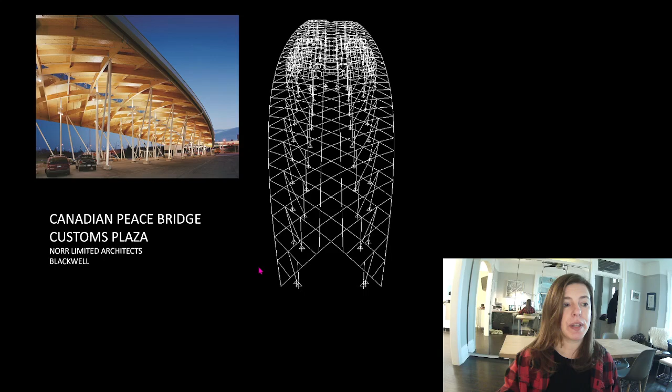NCFS headquarters - if Doors Open Toronto allows access to buildings this year, take the opportunity to walk through this building. It is absolutely stunning. It is the Native Child and Family Services headquarters.

This is an institution run by Indigenous people for Indigenous people, focused on the well-being of children and family within the Indigenous community in our district. They have places around Ontario that I know of, but maybe it's even national. This is a really lovely building - they really did it with focus, and Levitt Goodman is fantastic at dealing with bringing in Indigenous design features, and working with Indigenous designers to help realize these projects.

And they came to us, and this was probably 2007, 2008. They said, we want a modern representation of a Native longhouse. So we went away and said, okay. Dave and I had been playing with reciprocal frames, and we were really looking for an opportunity to use them. Reciprocal frames use small elements in a repeating pattern, and it's not stable until it's all in place. It has a lot of benefits.

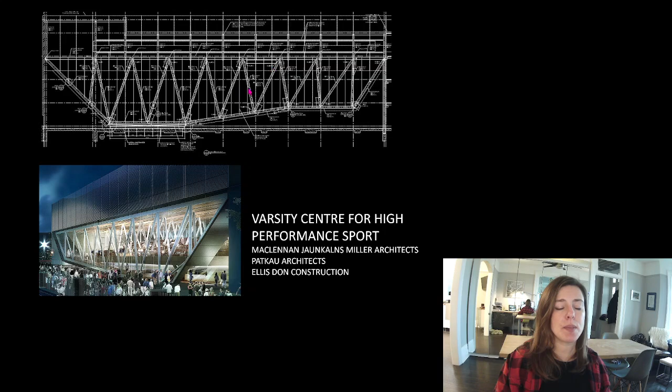If you've had the opportunity to go to the gym last term or even the year before, this is the Varsity Centre for High Performance Sports. This building does not touch down here at the ground. It is supported here and here, a 54-meter clear span over a field house or a gym below grade. So there was all kinds of reasons to do this, but it's a really unique kind of building structure.

So let's go through what this lecture is going to be. First, we're going to talk about what the expectations are for this course. Then we're going to go through strength, stiffness, stability, and then I always end the lecture with takeaway tips.

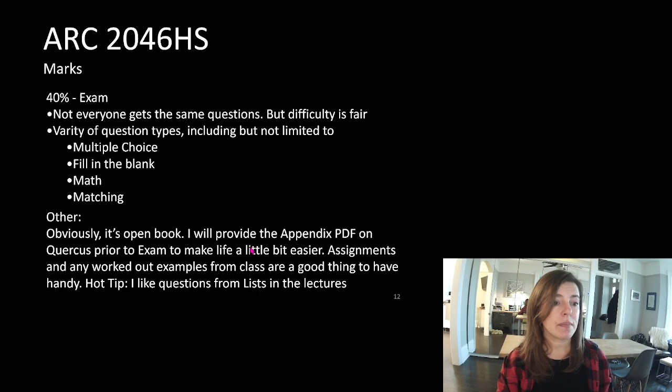So for the classes, I post the PowerPoint and the link to all the videos on Quercus. The first slide will outline the lecture and the learning points. The last slide will be the important items I think you should take away from that day's lecture. The PowerPoint and video will be posted by Thursday each week - my goal is always by noon. Today might be a tiny bit late, and I'll address that in just a second.

For the tutorials, assignment answers will be available the day after the assignment due date. Try to submit any questions to the TAs prior to the tutorial - maybe it gives them a chance to get their head around something, or maybe they have to do a little research to help give you your answers.

I want you to remember there's only one of me, and there's over 90 of you this term, plus I'm teaching Structures 1 at the same time. So start with the TAs - reach out to them and see if they can answer your question. If they can't, I am happy to get involved, but I'd ask that you start with them. It doesn't mean I don't want to meet with you, but between the two courses I have about 180 students, and if I had even a 5-minute email with each student, it would steal all of my productive time to record and prepare these lectures for you.

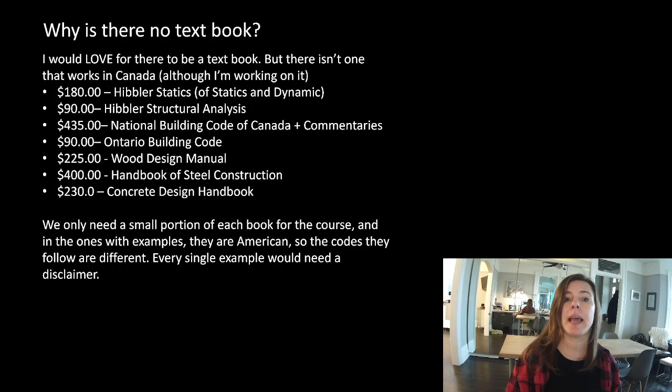And some of them actually even have published components that are accessible where you could use the problem sets and see how they relate to what we're doing. Again, there are more online resources.

One of the great things about structures is at least the majority of the components we're going through haven't changed in 150 years. The components around material sciences and earthquake design, for example, have huge advancements being made. Mass timber design is relatively new in the industry, but the principles we're following haven't changed in 100 years, which means a lot of what I'm teaching you here today is available in the words of someone else.

So if you find my voice high-pitched and annoying, feel free to look up another source to back up what I'm saying. Maybe you just need to hear it in another voice. It's purposely why I get Dave to give the lecture in your studio course on how to think about structures or how to pick your structural system, simply because you'd have heard my voice so much. I want him to give that lecture so you can hear some of the same things in his voice, or a different voice.

Don't worry about that. Okay, so why are we doing structures? You guys are architects, you're going to hire an engineer to do all your structural work, and that's true. Except you guys are often picking the materials and doing the layout and making preliminary drawings with preliminary sizes on them. To do all of those things, you have to understand material limits, and you have to understand the relationship between depth, length, strength, and deflection, and that a small change can have a big impact.

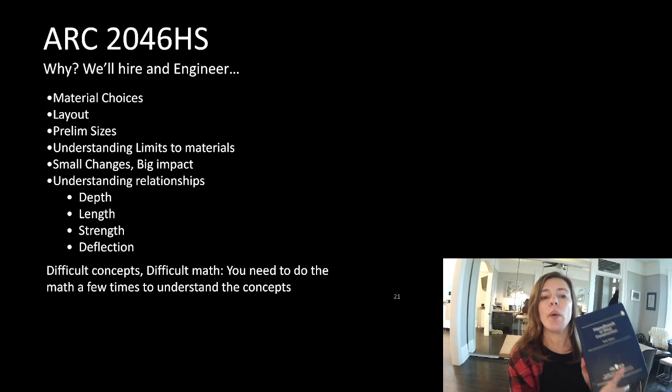So we're going to do, for example, when we get into our steel component, we are going to open up this book and flip directly to some pages that have very specific equations on them, and we are going to go through and do those equations. We're going to have to figure out what all the variables are, find the information for those variables, and then complete the math. Some of the equations look straight up bonkers, but we are going to work through them slowly, and we're going to break the math down to easily keep track of it without making mistakes. I'll try to go through that several times for you.

All right, structures 1 versus structures 2. In structures 1, we learned how to create our system. We learned how to do our preliminary design. Remember, that was all of our sizing guidelines or our rules of thumb.

For those of you that are just jumping into structures now, our sizing guidelines are posted on Quercus. You're going to want those. Those are going to be very helpful for preliminary sizing. You will probably use those throughout your career.

We figured out what all the loads are that act on a building. We looked at the load path. So how does the snow on the roof travel through the metal deck to the joists, get to the beam and get to the column, and then transfer all the way down to the foundation, and then design the foundation so it gets out into the soil.

So how does that snow load up on the roof make its way through the building to come out into the soil below the footing? And then we looked at what the internal element loads are.

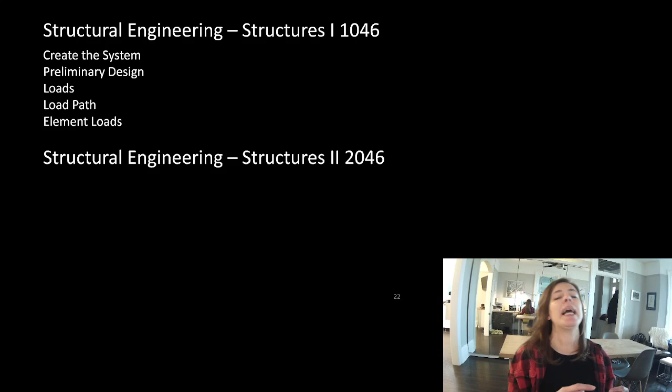We figured out what the worst factored internal loads were for those elements. Remember, factored means we figured out what all the loads were, combined them, and added an extra bit to make sure that was a reasonable load, but bigger than anything we should ever see. We could have multiplied it by 100, but then we'd probably have buildings that were unbuildable. So we gave ourselves a little bit of extra load, but not too much. We were very strategic about what we did there.

In structures 2, we need to design and size the members. Sounds simple, right? Well, to do that, we have to bring all of those concepts together. We know what those internal loads were on that member. We now have to find what member with a reduced capacity is strong enough to support those loads. Depending on if it's steel, wood, or concrete, the methods are slightly different on how to calculate that reduced capacity. And remember, we have to check axial loads, shear loads, and bending moment loads. So there are a few things we're going to have to look at here.

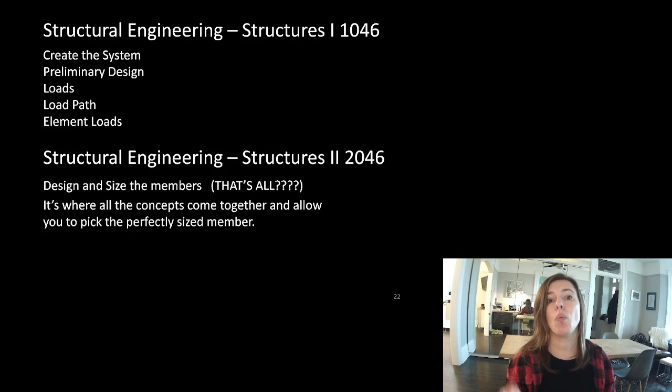But by the end of it, we're going to have a perfectly sized member for our problem. Remember, perfectly sized means it's going to have a reduced capacity greater than the factored load. It's going to be stiff enough to not cause damage to finishes. It will obviously be stable, because that was problem 1 that we solved. And it's going to be the cheapest possible solution we can find. Remember, cheap is often related to weight or the amount of material within the object. So number 1 goal: cheapest solution within our criteria that meets all those requirements.

So structural sizing guidelines, or our rules of thumb. Remember, it's key to remember that they're guidelines. They are not the designed solution, and they are mere suggestions. You can deviate from them, but we want to make sure you're showing something reasonable on your preliminary drawings.

If you're designing a 5-story building, and on your project you draw beams that are this deep, you have a height restriction on your building and you've built right to the maximum height you possibly can. Your floor to floor height is pretty tight, just meeting the building code requirements for somebody to walk around in that building. You go to the engineer, you get that member sized, and you find out it's not that deep, it's actually this deep. Now you have this amount times 5 that you have to add onto the height of your building. You're over your maximum building height, which means you have to chop a story off your building, and now the owner comes back and says this building isn't financially feasible for me anymore.

I needed to sell a certain amount of retail space to be able to make this project possible, so we have to scrap the whole project. It would have been very important to know that at a very early stage in the project, or come up with a framing solution that would allow your member sizes to be that shallow.

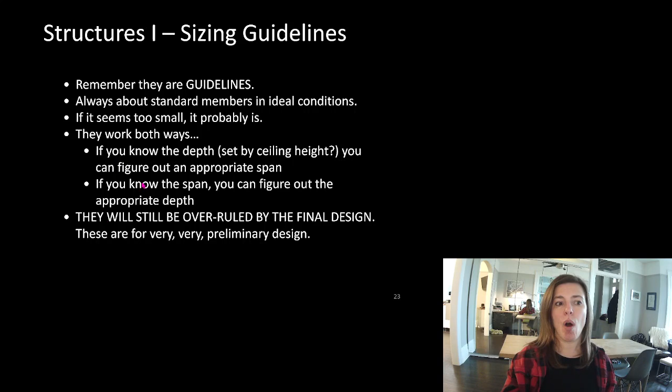We also looked at loads. We're going to go through some of this in depth next week. We figured out what the dead loads were on buildings - that was the self-weight and also superimposed loads. We looked at live loads for people and stuff, and we remembered that over very large areas, the probability of every single spot of that floor having that peak load on it got less and less. So with that, we got to use a live load reduction factor.

We talked about snow and wind being climatic design loads, based on a 1 in 50 year probability of that snowstorm occurring. Are we finding that we're hitting those 1 in 50 year events quite often? Yeah, we are. We're in a unique situation where the climate is changing. Some of you might not agree with that - I'm not here to quibble with you. I'm here to tell you that statistically, we are seeing an increase in some of these loads.

We looked at earthquake design. We didn't go too in-depth, just old school methods. If you have the opportunity to talk to Pedram, they'll say they have a much more complex and in-depth way to do seismic design. We kept it very simple for our structural course, really to help you understand that the ground's moving, the building's going along for the ride, and how much force is acting on that building is very much dependent on its weight.

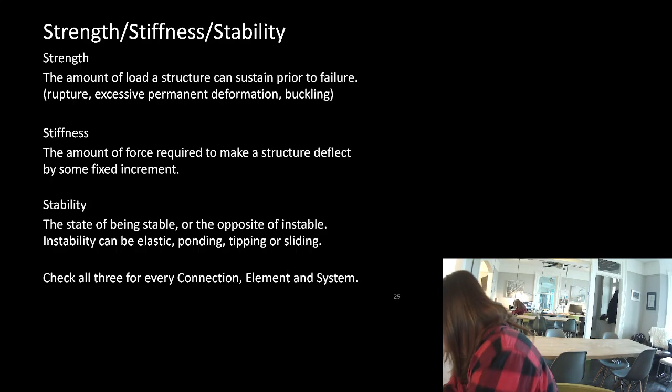Stability is making sure things don't move. So moving and deflecting are not the same thing. Movement - I've had to hide my foam block because my kids get into it and it goes missing. Movement means, is it flying up in the air? Is it sliding back and forth? And is it spinning around? We don't want those things to happen.

If it is stable and it deflects, that is stiffness. So there's deflection or deformation, and there's movement. We don't want it to move - we want it to be stable. And we have stiffness requirements or limits on how much we'll let it deform.

Strength is life safety - that's the amount of load a structure can sustain prior to failure. This is about preserving life. So we want to know how much load the structure can sustain prior to failure, and then we try to make sure we build in a little bit of redundancy in the system.

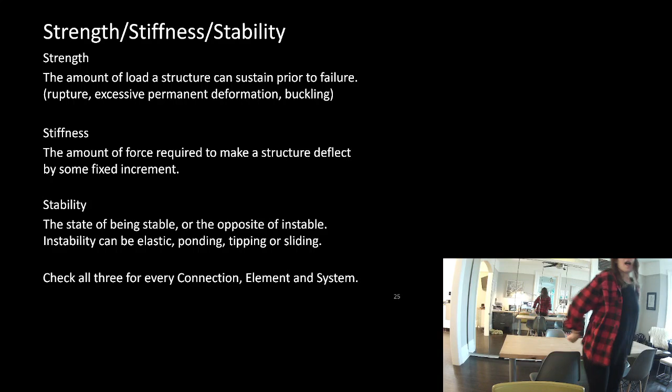Because as I've said before, if I had this table here and we designed it exactly to support the weight of me and the self-weight of the table, and I went out and ate a cheeseburger and drank a beer and came back and sat on this table, I'd make this table collapse. And we do not want that to happen.

Stiffness is the amount of force required to make a structure deflect by some fixed increment. That does not mean our object is moving - it means it's deforming or deflecting. And stability - worst definition in the world - is the state of being stable, or the opposite of unstable.

Instability can be elastic, ponding, tipping, or sliding. Basically, we don't want our object to move, and this is something you very much have an innate sense of. We have to check all three of these things - strength, stiffness, stability - for every connection, every element, and every system in our building.

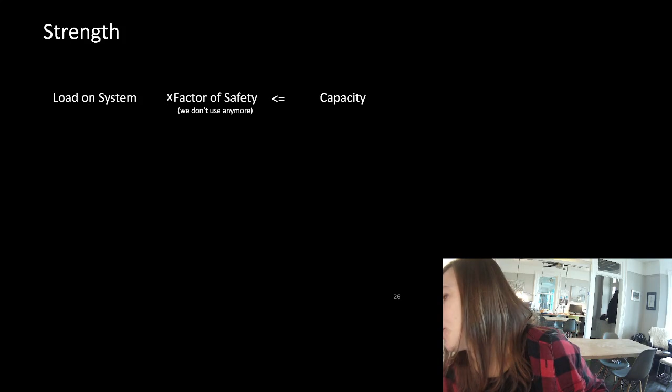So like I said, this lecture is going to be pretty light, and for most of you, it's a bit of a redo.

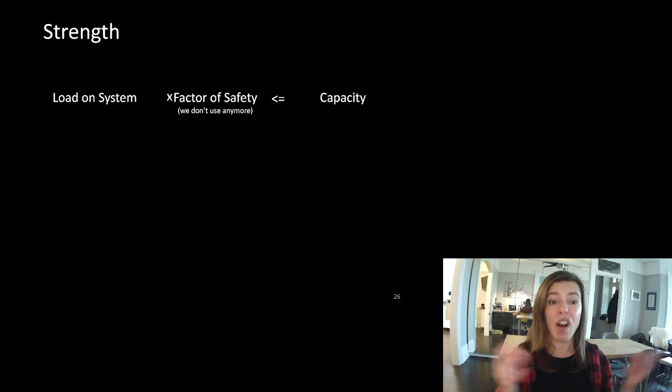But okay, back in the day, we had a different way of doing our strength design. There were flaws with this process. It was causing us to sometimes not design the best buildings, and we were wasting a lot of material. We weren't being smart in our design process.

So with this system, what we said was: I'm sitting on my table, there's the weight of me, there's the weight of the table. We add my weight and the table's weight, and then we put some factor of safety on it - maybe it's 2, maybe it's 5, depending on the application. We had a list of different things, and then we just had to make the weight of me and the weight of the table added up and multiplied by some factor be less than the capacity of the table.

The problem with that was the weight of me is much more likely to vary than the weight of the table is. The capacity of the table, though, also has some flaws in predicting it. There could be mistakes - not mistakes, but maybe there's a problem in just assigning the buffer into the load side of our equation.

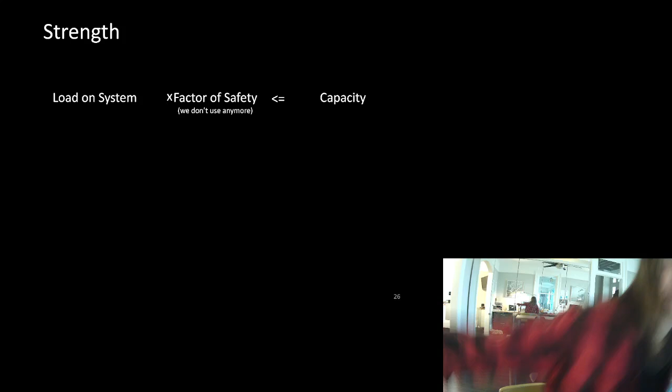So what we did is we said, well, what if we do two things differently in this method? Let's reduce the capacity some amount, and let's treat all the materials differently - let's give each material its own reduction. So we're going to reduce the capacity of each material dependent on that material.

And then we're still going to factor the loads on the system, but we're going to do it differently. Rather than add all the loads up and apply a single factor, we're going to look at each load type individually, because the odds of the table being wrong or having an increase in load is a lot less than me - I could go out and have 10 cheeseburgers and 10 beers and come back and sit on that table. I could, God forbid, have a third child and come back and sit on that table. So the variability in the live load is much greater than the variability of the dead load of the table.

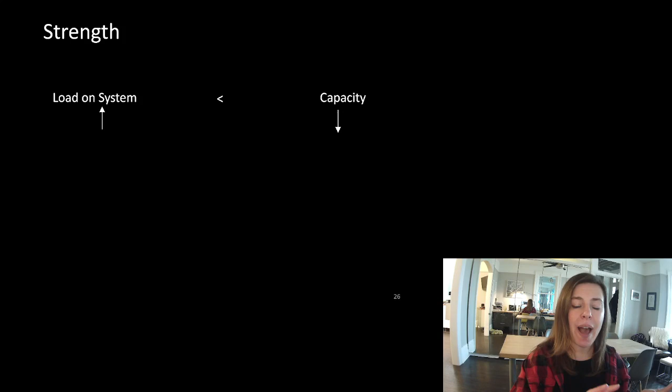So what we do now is we apply a different factor to each load type and then add them up. We have factored up the load and reduced the capacity. We want that factored load to be less than the reduced capacity. Remember, we want the cheapest thing possible within our criteria, so if they're pretty darn close to equal, we have done a good job.

We'll often use little symbols. You tend not to see the factored symbol or the alpha in front of load very often, but you will see this right here a lot in the coming term. If you see this, we are saying we have reduced the capacity. Now, engineers like to use Greek symbols for a lot of things. You're probably becoming more familiar with Greek letters throughout this pandemic. But if you see this, we're talking about a reduced capacity, or the amount we're reducing the capacity of that material.

If you see the subscript F, you know that somebody has already factored that load. If you see the subscript R, you know that somebody has reduced the capacity of that member. They have calculated what its bending capacity is and reduced it just a little bit. So this is handy because now we know at a glance if we have to factor it or if it's already been done for us.

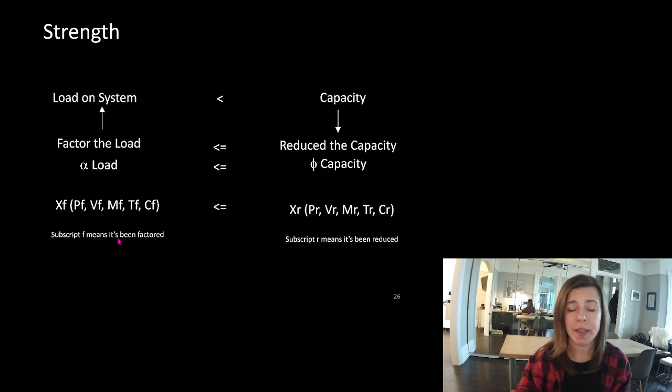This is called limit states design. We break it up into two components. The strength side of it is the ultimate limit states design. And then in stiffness, we're going to talk about serviceability limit states design a little bit, or we did last year.

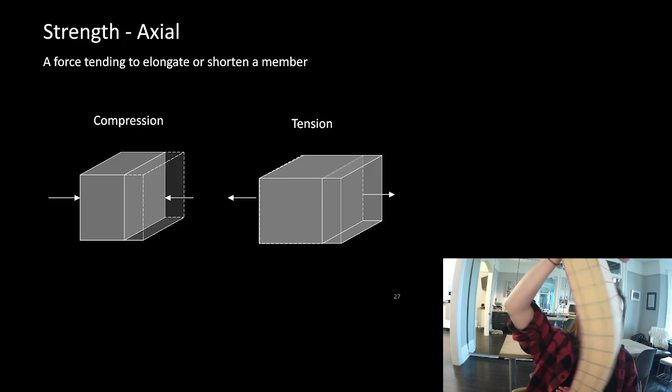So what are these force types that we talk about? Well, there is compression, and we squash things. Now, last term, we saw a lot of me using this wonderful object, and if I squash it this way, it really didn't do much to the foam, but this weird thing happened where it popped out sideways. And so that's something we're going to talk about a little bit later, and it's going to be very important in how we talk about design of materials coming up in the term.

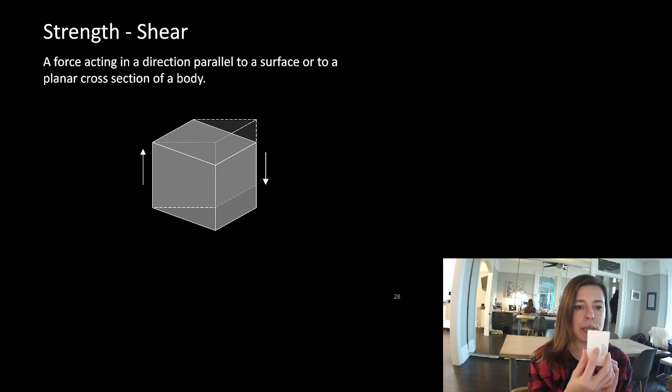Tension is when you're stretching something. Shear force is difficult for people, I find. Shear force is really what we're saying happens at each plane. These are my business cards, and I am saying that if I push down on this side and slide up on this side, I am talking about what happens on this plane. Well, then what if I go one business card over and I do the same thing? And I go over another business card and do the same thing. And we do that again and again throughout that deck of cards.

We talk about that shear at each plane. Well, I could talk about it here and here, and I want to know what shear is happening kind of on that spread out distance. So we do that at infinitesimal spots along the length of the beam. A lot of you probably recognize that as calculus. Now, we're not going to do much calculus. I'm not going to make you differentiate or do any integrals at all. But obviously there was a lot of that in my education. For us, we're going to stick to it being relatively simple, but I want you to notice something here.

This was the original shape of our square. Look at the unique shape of this here. As we shear it, this side has come down and that side's gone up, and we've skewed our triangle. This distance is shorter than this distance now. So we've had a lengthening along this axis, or a tension along that axis, and a compression on that axis. And that is a pretty cool takeaway. It almost looks like we could convert shear some way into talking about tension and compression.

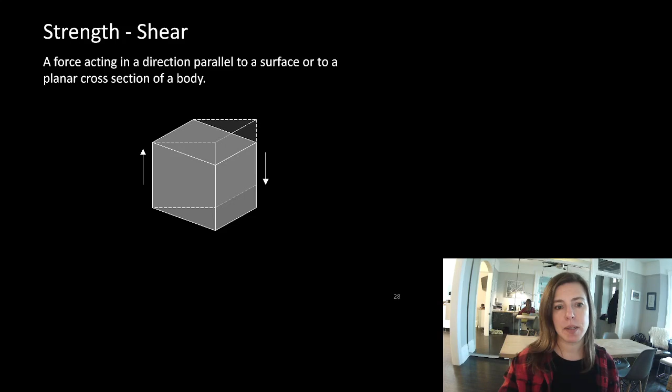Bending. All right, we've got our handy foam block here. Bending is a force that acts to bend a component, putting one side of the part in tension and the opposite side in compression. You guys remember we did this using method of sections on a truss. And when we went through, we saw that the top chord was in compression and the bottom chord was in tension. And then we talked about how that could be represented as a moment.

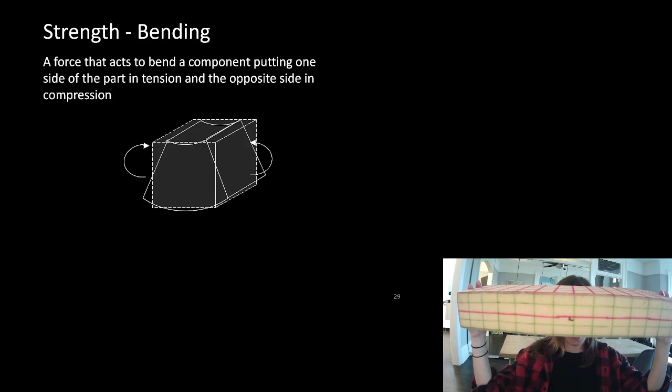So let's look at it. Let's see if what I'm saying is true. If I bend this foam block, look at that. The top is squashed and the bottom is stretched. It does in fact look like the top chord is in compression and the bottom chord is in tension. And it almost looks like there's no change in the length of that pink line. It looks like not much is happening there. It's deformed, but it hasn't stretched or compressed at all. And all of those green lines, they all look like they've stayed straight, interestingly enough.

And that's going to be really exciting and helping us in a couple weeks, I think in week 4, when we talk about stress and strain and how it relates to bending.

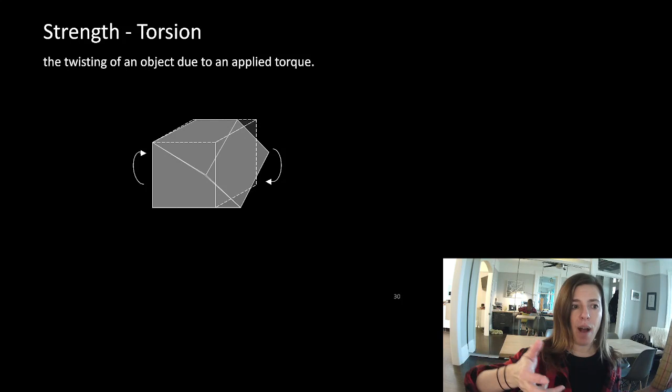So torsion isn't something we're really going to focus on in this course, but it's kind of a weird combination of bending and shear. So sometimes you'll even hear, if you've ever used an impact driver and overdriven or kind of twisted the head off, you know that you'll often say you sheared the head off of your bolt. So it's this action here. We're not really going to get into that, but I just wanted to tell you that it exists.

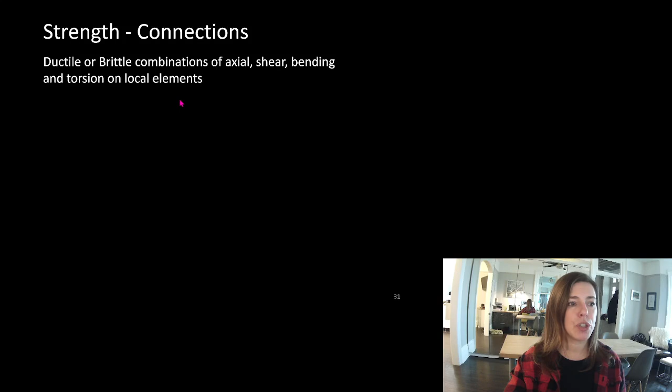Connections are where elements meet each other. And so we can have brittle or ductile combinations of axial shear and bending and torsion on a local element. So if we have a beam connecting to a column, we have to connect them with something, and that has to be designed to handle the transfer of whatever forces need to get from this object to this object.

All right, I find the best way to show images of compression, tension, shear, bending moment, stiffness, and stability is to find images that show failures. Showing you something that works doesn't really help you at all. Everything around us is meeting all of those requirements. The best way to show you what these things are is by visuals of them failing, of those things not working.

Now, concrete has almost no capacity in tension. In fact, we will often say it has zero capacity in tension. Great in compression, so great that we use it all the time. But concrete has a flaw in that we don't really know how strong it's going to be until we actually make it, and we make it on site. Wood, we kind of make the elements off site. Steel, we make the elements off site. Concrete, we make in situ.

We can try to predict what its strength will be. We can say what minimum strength we need it to be, but we can't be positive it was gotten right until we actually make it, but it's already being used. So what they do is when the truck comes to site and they pour their concrete slab or the columns or the beams, they also cast concrete cylinders. And then they take those 3 cylinders back to the shop, or the people doing the testing take them back. And at 7 days they test it, and at 28 days they test it, and at 56 days they test it. And then we see, did it meet the strength requirements we needed it to meet?

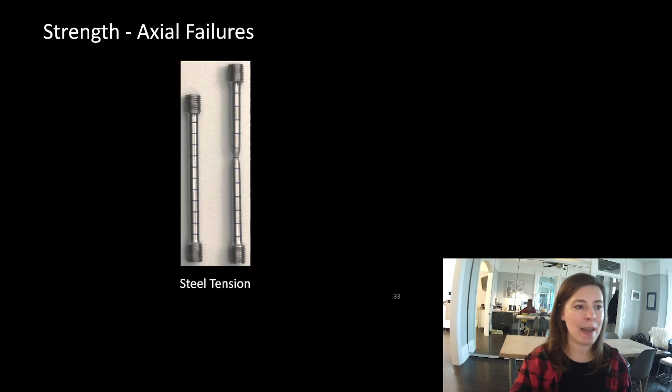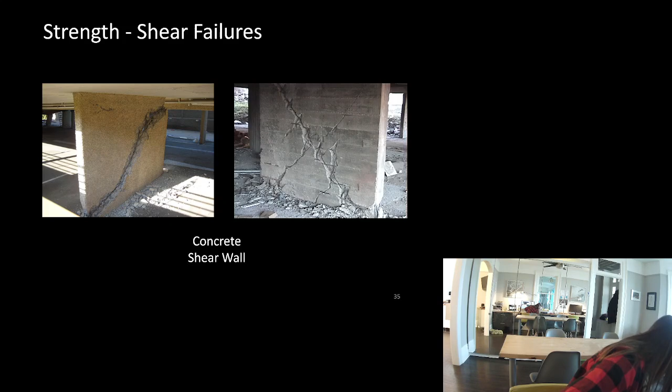That line is exactly the line of our diagonal members in braced bays. Now there's variations to those, as you guys remember, all kinds of variations we can do. But that's usually the cheapest primary format that we do.

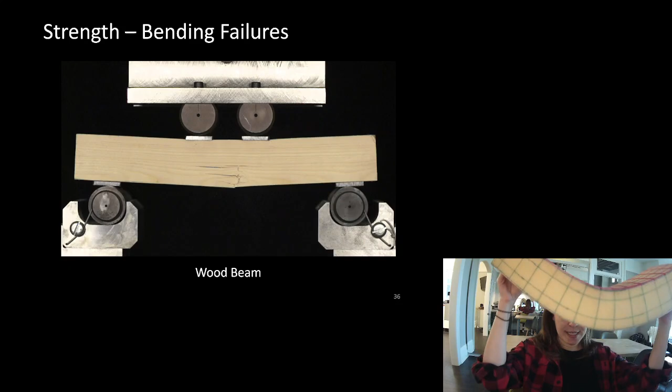All right, bending failure. This is a wood beam with a load bending downwards, so the top is in compression and the bottom is in tension. You can see that this wood split right here and we have a bending failure. I didn't list it, but there's also a crushing failure right here, where our wood kind of crushed a little bit right where the point load happened on it. Remember how we've talked about pin roller conditions? When modeling this, you can see that they've built in literal rollers into modeling this.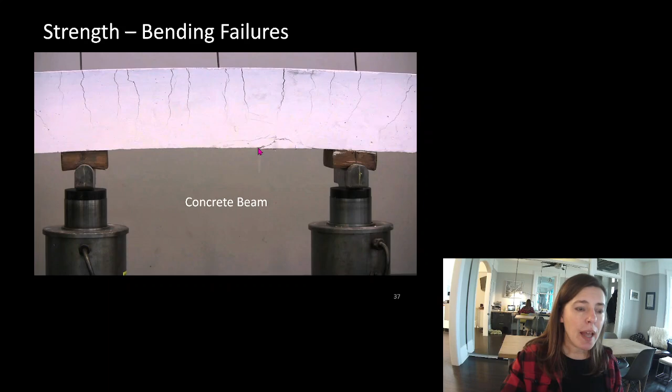Concrete is crap in tension, so you can see all of these tension cracks. Now what we do to stop these from propagating is we put reinforcing in here. Normally our beams are bending in the opposite direction, but look, there was even some crushing of the concrete right here.

Steel has a wonderful, unique property that we make use of called ductility. We're going to spend a lot of time talking about ductility.

What I've always said before is that strength, stiffness, and stability are very distinct things, but it's not always obvious how distinct they are because they can turn into each other very easily. So this steel beam had a load being applied to it like that.

At some point, it yielded here. We're going to talk about what yielding means going forward in the term. So it yielded here, and then we got large amounts of deformation. It hasn't broken through like our concrete and our wood did, but it is bending so much that we have exceeded any stiffness requirements we might have had. And look at this, it bent so much that if that was on supports, they would have come right off their supports and turned into a stability problem.

So we can see situations where it's not always obvious which thing precipitated which, and we're going to talk about those a little bit. Part of your assignment problem—it's literally the same assignment you did last year, so don't panic—some of it is I want you to think and talk about it. Have a discussion during the tutorial if you'd like, because some of these things, some of the ones I gave you in the assignment are a thought exercise, and it might not be obvious which one is the right answer. There might be multiple right answers for some of them.

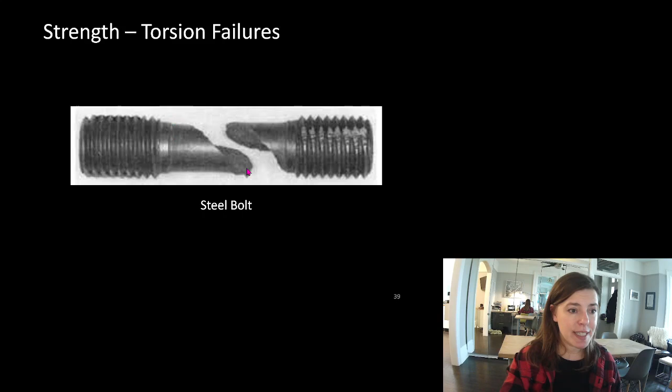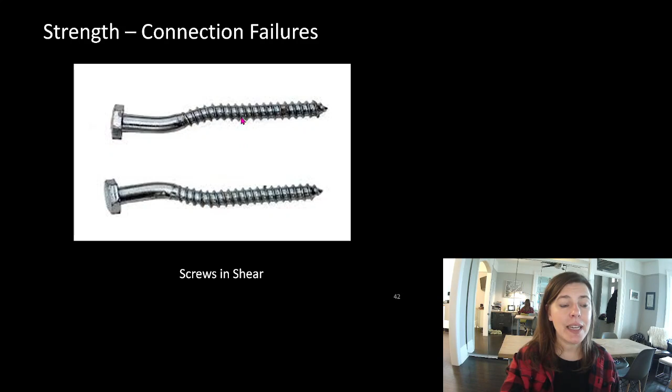All right, what I do like is this image. These are two different—these weren't in the same thing, I think it's just two sides of the same screw. But you can see that this was where two things slipped past each other right around here, and it has deformed this screw in that diagonal shape. This is a clear indication of a shear failure.

So what they'll often do is, to speed up the steel installation, they'll have someone follow around and only put 1 or 2 bolts in to make it stable while they install the rest of the steel. Then they come back and usually hire the cheapest person on the site to go back and finish putting all the bolts through, so they're not paying the very expensive crane operator to wait while they install the bolts. What sometimes happens by mistake is that the rest of the building gets built without those bolts getting put in. So when I do a site review for steel, one of the main things I'm looking for is whether all of those bolts are installed.

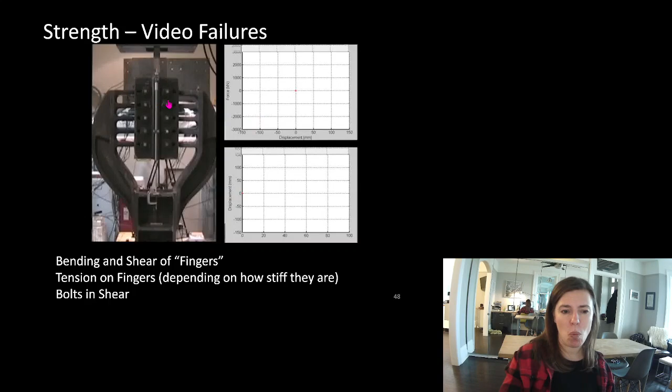So this is another cyclical loading event, and the idea here is that all of these fingers start to resist the load, and because they're triangular in shape, they really make maximum use of the steel material in resisting the loads. So there's lots of cool stuff going on in this video, but it's also really fun to watch stuff fail. Feel free to watch that video too.

Okay, let's move into stiffness. So that was all strength. Let's talk about stiffness now.

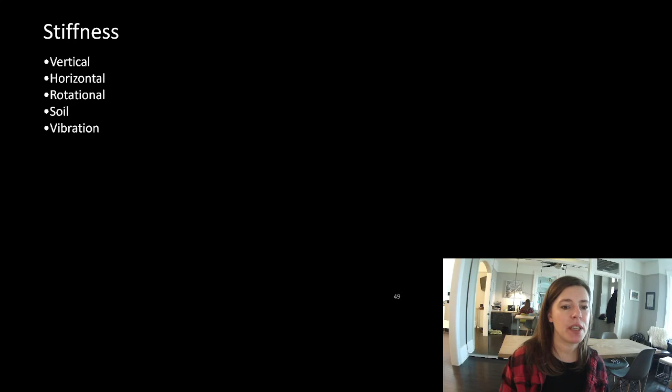Stiffness, we have stiffness criteria. It's not about life safety. This is usually about preservation of finishes and human comfort. We're going to talk about what goes into defining the criteria in the next slide. So we're worried about vertical stiffness, horizontal stiffness, rotational stiffness, soil stiffness, and vibration. Now, some engineers would argue that vibration doesn't really fit in with the stiffness criteria, but in terms of talking to architects, I find it easiest to lump vibration in with stiffness.

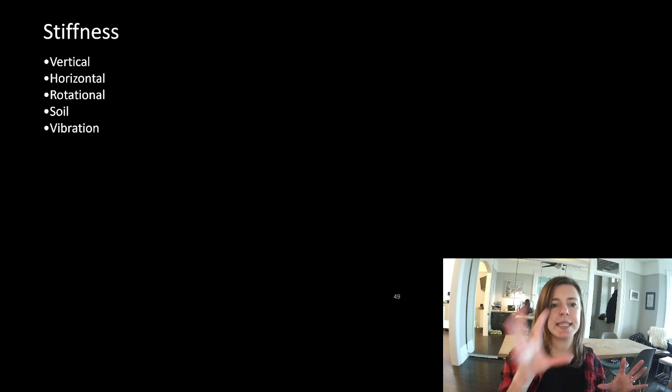Now, don't worry about this too much, but I just wanted to let you understand the term stiffness. Most people understand flexibility. Well, stiffness is just the opposite or the inverse of flexibility. If something is very flexible, it's not stiff. If it is not flexible, it's very stiff.

So what sets our stiffness guidelines? Well, human comfort. Are we comfortable with whatever is happening? People don't like standing on a floor that bows, or if they walk across it and feel it drop while their load is on it and they come back up. Preservation of finishes is a big one. We don't want to see cracks in our ceiling. We don't want our windows to bust. Stability can set stiffness guidelines. Something might need to be stiff enough that it doesn't turn into a stability problem, and we'll talk about that. It can be tied in with drainage as well. And then interface with building elements, so how two things might deform relative to each other.

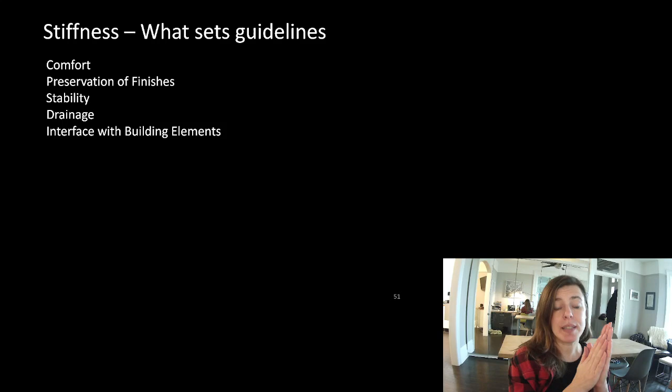So some of the math that you'll have to do in this week's assignment, which again is the same as last term, is about serviceability limits, or the serviceability limit states design. Sometimes you'll see me call it SLS versus ULS, which I use for strength. This is a very quick overview of the guidelines. This was updated last year, I'd say, just before I started teaching you guys. Some of these criteria have changed throughout the codes, and these are based on the individual material codes. Now, some of them no longer publish explicit standards, but the industry has standards that, even though they're not published, you still probably want to meet them.

Serviceability is not a requirement in the building code. It is a very, very, very strong suggestion in the building code. So much so that I would say probably 90% of the lawsuits you see in architecture and engineering are about stiffness. It is about damaged finishes. It's very rarely about strength because there's very few actual failures in things.

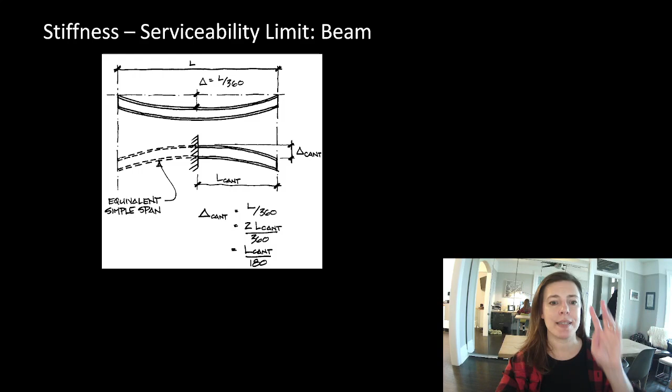If it's a cantilever, we can do 2 things to help us get our head around it. We can ignore back here, say this is the length of our cantilever, and take our deflection criteria and divide it by 2. Or you could say, if this is our cantilever, it's the same thing as a beam that's this long meeting our normal deflection criteria, or we could double the length of our cantilever and divide it by the normal deflection criteria. I normally treat it as the same information, just 2 different ways to say the same thing. What you'll see me do usually is just take the length of the cantilever and divide it by 2, but I like to show you this because it explains where that's coming from.

Okay, stiffness serviceability limits, let's do an example. What is the amount of live deflection we will accept for a wood floor beam with drywall? The drywall tells us it's susceptible to damage, that spans 10 feet and has a 2-foot cantilever. So here's our cantilever and here's our back span. We've got live load, we know what load type we're caring about, we know that it's wood, we know that it's a floor, and we know that it is susceptible to damages.

So let's look at what our criteria is. It was a floor, live load, susceptible to damages, and it's wood. So it looks like L divided by 360 is the criteria we're going to use.

So let's convert our 10 feet into meters or millimeters, because I usually like these answers in millimeters. In the assignments, you will see very explicitly how many decimal places to put and what information I'm looking for. So let's take our 10 feet, multiply it by 12 because there are 12 inches in a foot, times 25.4 because there are 25.4 millimeters in an inch.

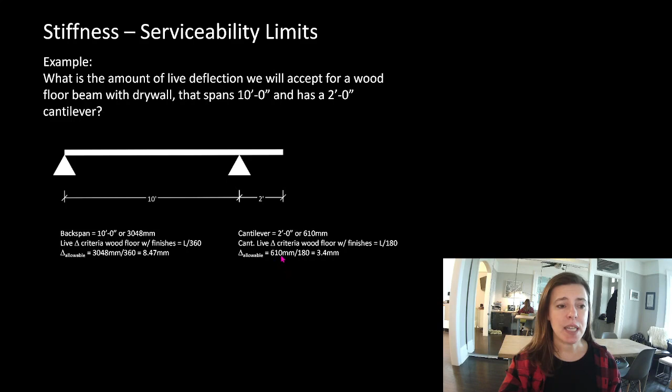Our cantilever is 2 feet long, or 610 millimeters. We know that the wood floor with finishes supporting live load is L divided by 360. So for a cantilever, it's L divided by 180. So my allowable maximum deflection for the cantilever is 610 millimeters divided by 180, or 3.4 millimeters.

So you can imagine if we put a big point load right here, we're going to deflect down like that. We might actually pop up here. But if we put a big point load here, this could deflect down and pop up here. Or we could put a load all the way across this uniformly. We don't know, is it going to go down there and bend up a little bit? Is it going to be so heavy that it's going to bend down and down? We're not quite sure. That's why engineers really look carefully at a cantilever deflection that doesn't meet serviceability criteria. Because sometimes if it's very short, our criteria says we can have 0.01 millimeters of deflection, which is just crazy because that's totally fine. So sometimes we might say, let's take away this criteria because it's not reasonable.

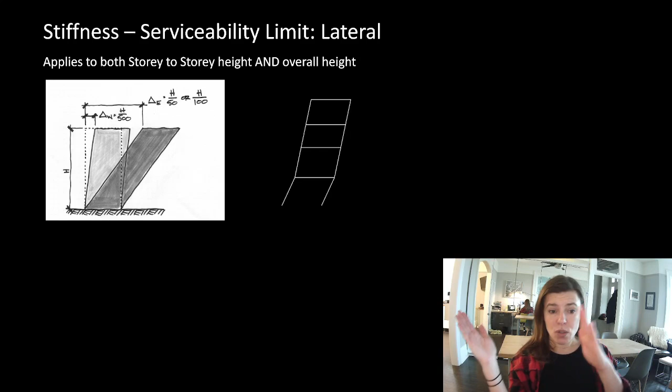All right, serviceability limits for lateral loads. We have 2 different criteria we have to meet for 2 different load types. We have wind that's trying to tip our building over, and seismic loads. There are also live loads and other things we have to worry about, but usually these are the ones that are going to be the problem here. Our deflection criteria for wind is H divided by 500, and for earthquake it can be H divided by 50 or H divided by 100. And in some places in the States, it's actually H divided by 40. So there's variability in what that criteria is.

Let's say I had a 32-story building with 4-meter floor-to-floor heights. So 32 times 4, let's times it by 1,000. I have 128,000 millimeters tall divided by 500. I'm allowed to move my building at the top 256 millimeters, or 10 inches. That is a huge amount of movement.

Luckily, many steel buildings are very ductile, and we can allow those sort of movements. In fact, it can actually help us for some things. Seismic loads, we can end up with huge deformations, really, really large deformations. Now, that's the height of the building as a whole. We also have the criteria that any single story needs to meet that criteria, so that we don't end up with a really stiff building where all of that movement comes out in one story.

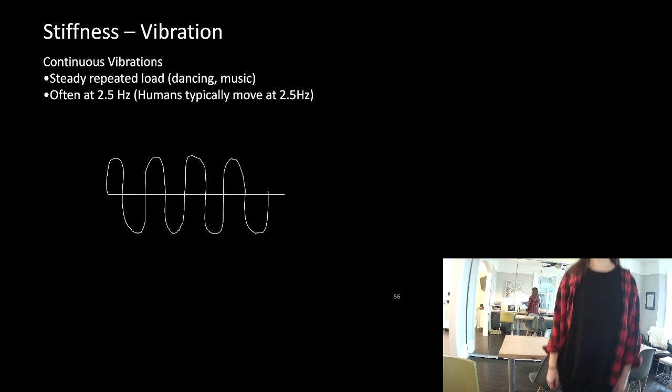What's really interesting is when we're all in a room together, everybody's moving at different times, but the rate of movement tends to be almost the same. And it's going to be pretty darn close to 2.5 hertz. We have that cyclical movement. So we are very sensitive to a movement of around 2.5 hertz. I always like to keep standing up for this.

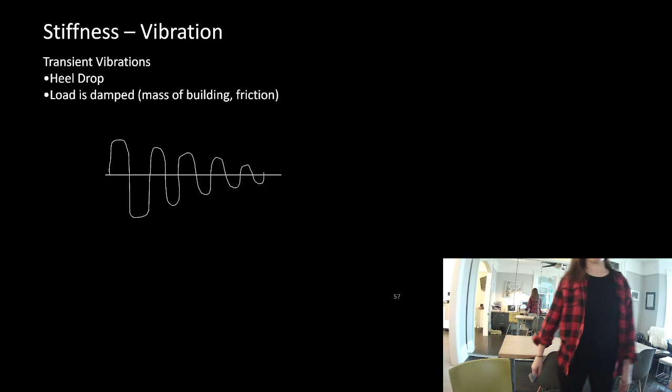We are very sensitive to transient vibrations as well. If we feel an impact load of some sort, we care about how quickly it disappears. If somebody drops something on the floor beside you and you notice it, that's fine. It goes with the loud bang and you feel the movement and then it disappears. You tend to be okay with it. But it really bothers you if it keeps going. So I always do a nice big heel drop. You're going to see my camera move. Now, what's interesting about that - you probably noticed that my window rattled longer than the camera kept moving.

My camera is on an arm stand that is actually dampening the load, a benefit my window didn't have. So my window vibrated longer because it was more susceptible to the transient load.

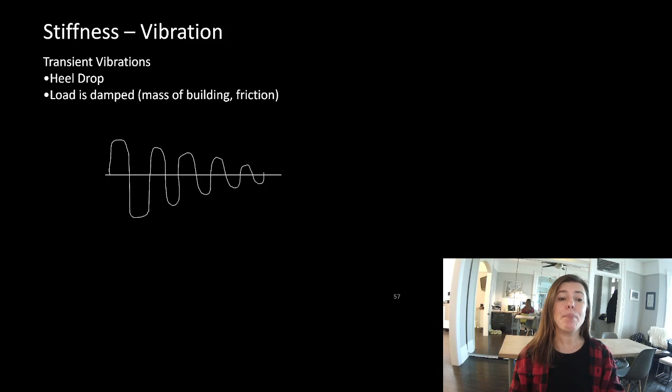One of the other ways we deal with transient loads is by mass. Most buildings have a concrete topping on the floor, even if they aren't built with concrete, because we like concrete to deal with dampening our load. Now, I am not a huge fan of concrete construction and what it does to our environment, and there's a lot of talk about that. The one place I do feel it solves a large problem is on toppings for floors. There are other methods of doing it, but if you're already pushing innovation in a lot of spots, using your concrete smartly becomes a very good thing to do. So if we can get rid of 90% of the concrete construction and limit it to a much smaller portion, we're doing a good job there. Should we eventually get rid of all of it? Probably, but using it smartly is the best thing we can do right now.

All right, amplification or resonance. That's when two things respond, or when an object has the same vibration at a natural frequency as the load being applied to it. So if a bridge, for example, has the same natural frequency of, say, 2.5 hertz, and a group of people are marching in lockstep across the bridge, it could cause amplification.

In fact, you've probably all heard the story of a pedestrian bridge actually collapsing due to an army movement of everybody walking across in lockstep. Now, there's debate about the truth to that rumor, but for a very long time, armies did tell marching teams that they could not march in lockstep across bridges, simply because it was very dangerous for the bridge.

So it could also be wind or seismic loads. We need to make sure the natural frequency of our objects does not match the frequency that is going to apply the load to our object.

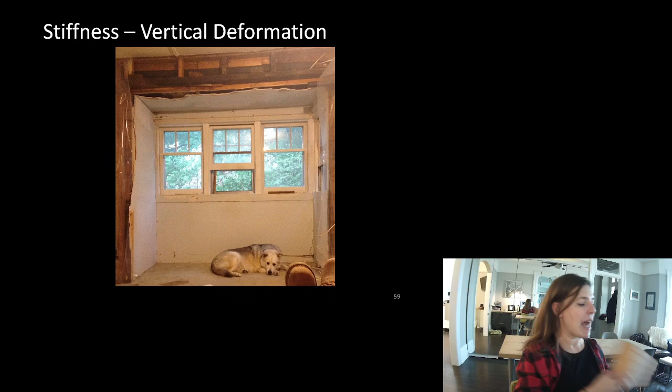Vertical deformation. So a beam in bending. I wish I had something long and flat. So how much deflection is that, or deformation? Not movement, because my object is staying still. You might hear me say movement sometimes, I'll try not to, but I'm talking about deformation.

So this was my old crappy house. When Dave and I moved in, we threw everything we owned up in the attic on a floor that wasn't even a floor, it was literally just rafters. So we put wood down up there and threw all our storage up there, with the understanding that there was a beam in here for this little pop out. When we decided to do our renovations, when we took the siding down, we saw that what was in here was just a 2x4 on flat.

It had about 2 inches of deformation in its span, and I think that was about 8 feet. So 8 times 12 times 25.4. Let's say it was all live load, so divided by 360. The maximum allowable deflection for that beam should have been 6.4 or 6.8 millimeters, or around a quarter of an inch. It had deformed 2 inches.

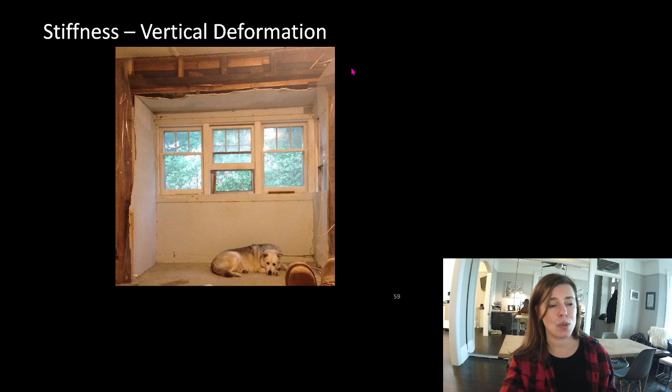So obviously the beam that was there was undersized. Forget about strength, it obviously didn't work for strength either. It hadn't failed, which tells us that there's lots of redundant load paths in wood construction. But we very much needed to solve this problem. So we did the calculation. It ended up being 3, I can't remember if it was 3 2x8s or 3 2x10s that we needed to put in there. So we had to jack the floor up and then put the new beam in.

Differential settlement. So with soil, if you put a heavy load here, you can end up with differential settlement between two parts of soil. And like I said, masonry really telegraphs a crack easily. So most materials, you might get a little crack here and a little crack here and a little crack here. Masonry, all of your deformation will happen in one spot and it will read as a gigantic crack.

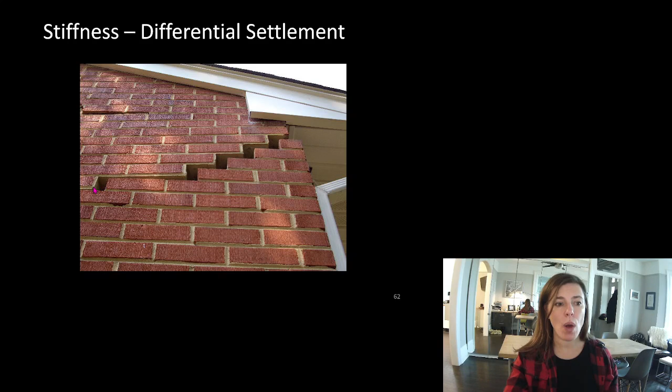Here is why we need lateral load resisting systems. This is a building that has a big opening in it, and these pieces of wood probably were not connected together in a way to transfer loads across the shear plane and how they relate to each other, meaning that under a lateral load, the building collapsed. This is a common thing you see in boathouses, for example.

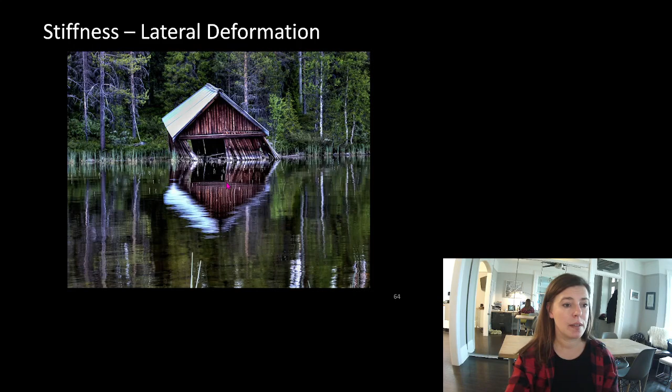I'm not going to play the videos, but you can watch this video. I really love this video, because everybody just stays calm while an earthquake hits this gigantic building.

This is a tuned mass dampener. It's a big, heavy weight that's supposed to help offset the movement at the top of the building. Think of it as a glass full of water. When it's pushed, if it was empty, it would slide. You fill it with water and you push it, the water moves, sloshes around, and ends up actually stopping the cup from moving, because the water moves really fast, hits the far wall, comes back. So as much as the cup's moving forward, the weight of the water is moving backwards, and it stops the cup from moving. That is a very simplified way of talking about a tuned mass dampener.

In this one, the camera is mounted to the building. So remember, the building is what's moving, but it doesn't look like the building's moving because the camera is on the building, so you can't see that the building's moving. What you can see is the damper moving, and you can see the people trying to balance themselves.

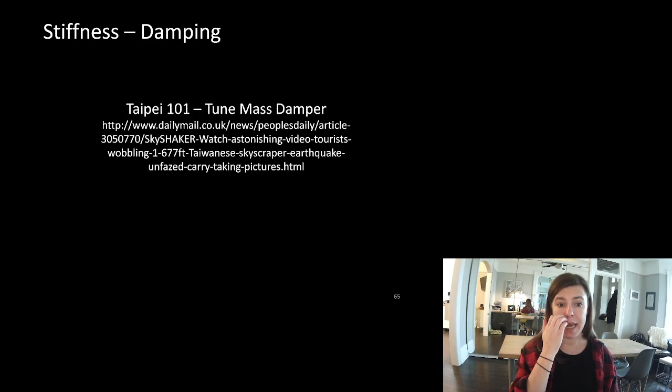I always find it interesting when people ask why aren't 100% of live loads counted in seismic design, or why don't we use live loads to add to our seismic load applied to the side of the building? Because people are natural dampers. We automatically try to throw our weight to the opposite side the same way the water does. So you could say that if your building was full of people, you could actually limit the effect of the earthquake, but what are the odds of that? We have to assume it's barely occupied, and those people that are in there need to get out alive. So the worst case load is no live load acting as part of the lateral load.

We do say there might be live load downward though, so we kind of massage things a little bit there. What's really cool about this video is one person is getting their picture taken during this earthquake, and they wrap their arms around the side. All of a sudden, they stop moving around, and they look like they're staying still, because now they're moving with the building and the camera.

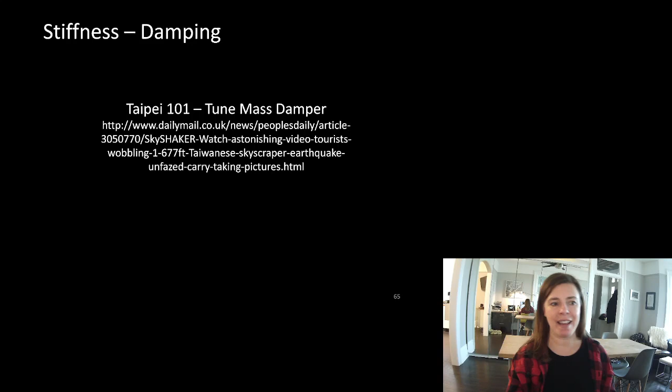I have two more cool videos for you to watch. These are both amplification. I'm assuming the football stand collapse is amplification. It looked like it to me.

This one is a bunch of football fans getting very excited, yelling and screaming. They start stamping on the floor and it collapses. I don't believe anyone was hurt.

The Tacoma Bridge collapse is a very dramatic version of amplification. Now, it's not as simple as that - there was also resonance of the cables and how the bridge deck moved. So the Tacoma Bridge collapse is much more complex than simply saying amplification, but it's good enough for now to lump it in with amplification. It is a wind load acting on the side that starts to make the bridge deck sway.

There was one loss of life, unfortunately, in this, and that was the dog that was inside of the car while it was happening. Don't think they didn't try to save the dog - an attempt was made to rescue the dog, but it was so scared it bit the owner, and the owner needed to get off the bridge. The bridge eventually did collapse. So watch those videos, they're really interesting.

Okay, stability. Stability, I think, is the one you most intuitively know, but the second I make you draw a free body diagram, it's like, poof, it disappears from your head. You stop thinking about stability. Now, if it's stable, it's not moving up and down, it's not moving back and forth, and it's not spinning in space.

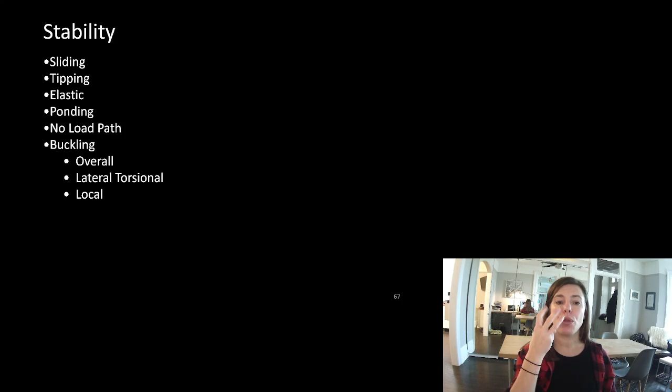And in rotation, we need to, in a 2D plane, ensure there is restraint in 3 degrees of freedom. In real life, we have 6 degrees of freedom that we need to restrain, but it's a lot easier to break things down into a 2D plane.

I'm getting lots of emails.

I'm about to find out if my youngest gets to go to daycare next week. They were understaffed because so many people were sick. And then a meeting I am missing right now—2 of the architects have COVID.

If you want to know what it's like to be a mom of small kids during COVID, there are lots of tears and lots of anxieties. I know I'm diverting for a moment, but I think it's important to address things when the opportunity arises, because you guys are not going to be working in isolation your whole life. You're going to be out there in the world, and it's easy to think the things that cause you stress right now will magically disappear when you're done being a student.

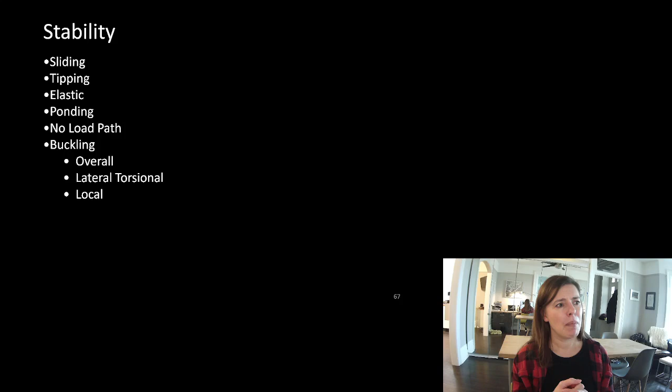I don't know if it's easier or harder—I can't put my finger on whether life gets easier or harder. Sometimes you feel like you have more answers, sometimes less. But I can tell you that being a mom during COVID, especially of small children, is a daily struggle managing anxiety, managing a household, managing workload, managing relationships, because you have no help. You have friends, but all of a sudden the only way to communicate with them is more online time. So I'm not trying to belittle what you guys are going through, because I can't imagine how hard it is to be a student right now—it's got to be absolutely bonkers. So I'll try to be understanding of you guys, if hopefully you'll be understanding of me.

Okay, let's go back to our 2D problem with 3 degrees of freedom, meaning we have 3 equations to help prove we have stability.

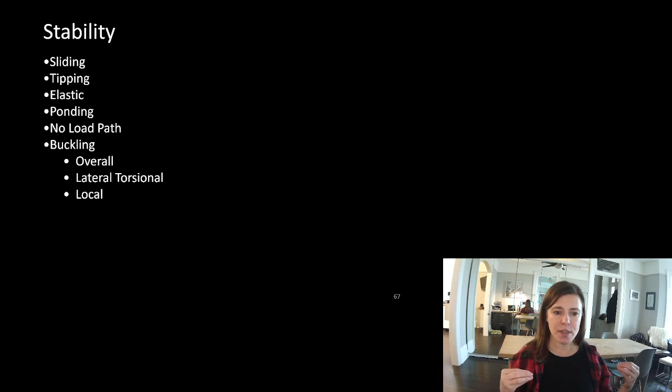Before we do that, we need to draw a free body diagram—I'm not going to draw it right now, but we'll talk about what needed to happen to keep things still. Some of the things we worry about with stability are sliding, tipping, elastic instability, no load path—meaning we didn't have a free body diagram that worked from the beginning—and buckling. Remember that funny thing we talked about? If I try to squash this way, no problem, I'm just squashing my phone. But if I try to squash it this way, the whole thing pops out sideways. So there's something beyond strength happening there, and that's buckling.

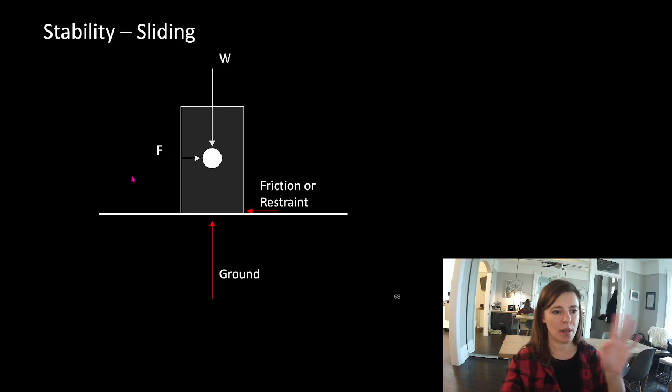Don't worry about the arrows too much, but sliding is when the force pushing sideways on our object isn't resisted by enough friction, so our object slides. We didn't have enough resistance here, so our object slid.

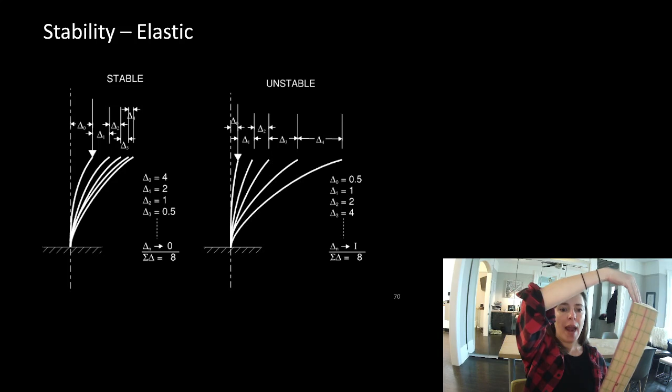Elastic stability: imagine a world where I've designed this beautiful straight column, but some small amount of deformation is built into it—maybe it was built a little crooked, or out of plumb. So the load meant to come straight down through the column is now not acting directly through the middle of it, causing a slight eccentricity. Remember, moment is force times distance, so if we have eccentricity from the center we wanted, we've got moment pushing downwards.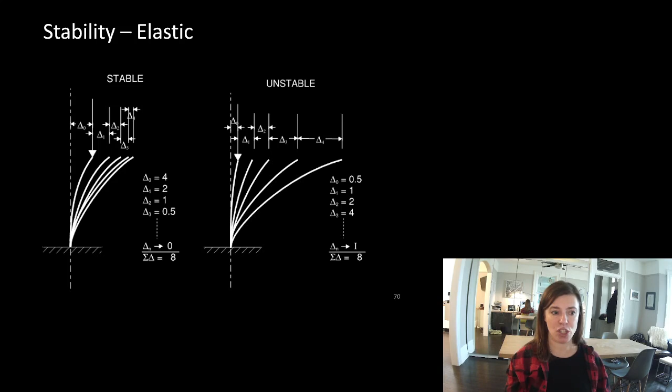That causes it to move a little bit more, which gives us more eccentricity, so we have to check it again and see how much it moves. We do that check again and again, and if the amount it moves decreases with each check, we've got a stable system. If that amount increases with each check, we've got a problem. You'll often hear that called P-delta, or our force-deformation problem—as we apply the load, we amplify our deformation or deflection.

It's really apparent in ponding, so I'll show you a picture of this. You can imagine that if we have water on a roof and our beam deforms, more water is going to pool right here at the middle, right where the worst part of our beam is. More water means more load in the middle, which means our beam deforms a little bit more, which attracts a little bit more water. We do that check a few times, and if the increment decreases, you can see this increment was smaller than that one, we have a stable system.

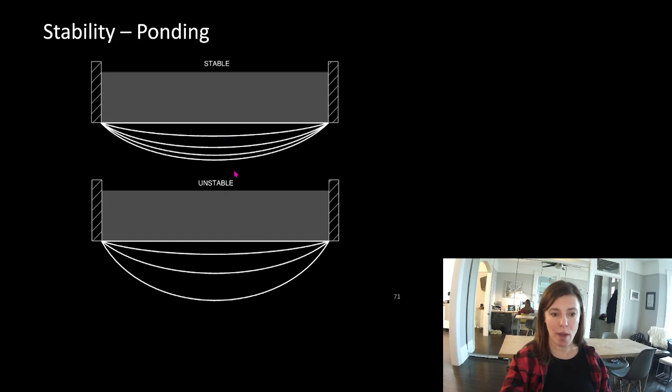We still have to make sure it's strong enough. That's a separate check. We also have to make sure it's stiff enough. Has this process deformed or damaged any of our finishes? So making sure it's stable is step one. Then we have to make sure it's stiff enough, and we have to make sure it's strong enough. If that increment increases, it's unstable.

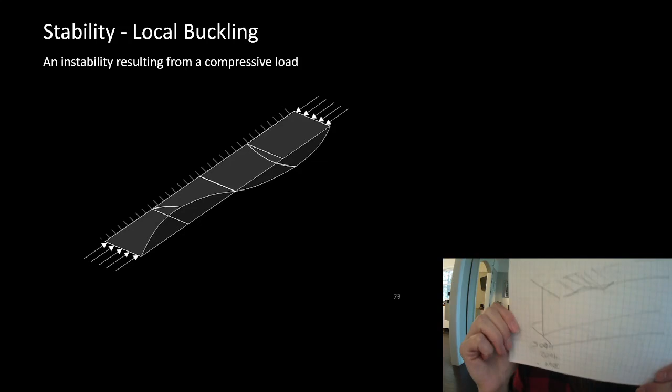Buckling: I have my compressive load on it, and it tries to pop out sideways. That is buckling. Local buckling is basically when one element of our object buckles, instead of the whole thing buckling from a compressive load. If this was a beam, with a top chord and bottom chord, remember, in normal bending the top chord is in compression. If just the flange buckles, or a portion of the top flange buckles, that's local buckling.

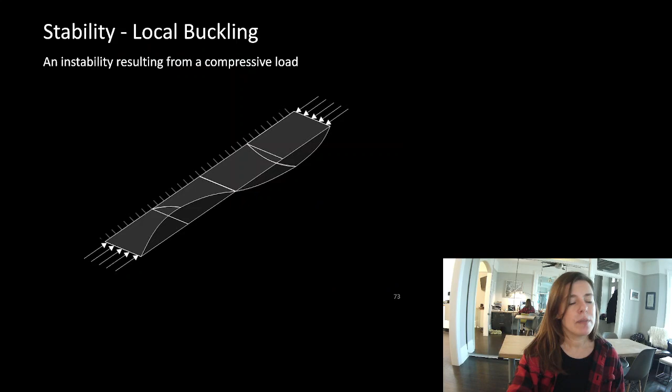Oh, I didn't include lateral torsional buckling. Well, we'll show that when it comes to it. I have a picture of that.

Okay, let's look at pictures of stability failures. It's not always easy to tell if the failure is actually stability or not, but I have some pretty good pictures that I think capture a lot of it.

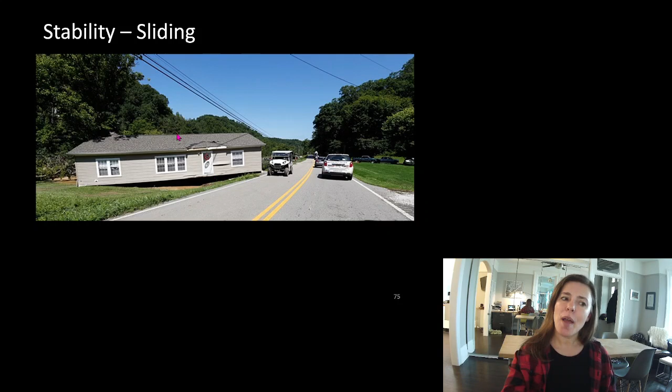Sliding: it is really hard to find a sliding failure picture. I am not sure how this building got here. I can't quite figure out if it was a flooding event, but I've been in spots after a flood, and the soil doesn't look like this, and this looks relatively recent. It doesn't look to have been a tornado because the trees all look fine, and it's near a power line, you would think it would have brought down the power line. I wonder often if it was on a flatbed truck, but normally it's not completely finished like this. It almost even looks like there's curtains in the windows when they transport it on the flatbed truck. So I have never been able to determine what caused this photo.

There is a desire to check and see if that roof can support the load of the mechanical unit and the snow that builds up around it, and see if it works for strength and if it works for stiffness, and to walk away from the problem.

But what we have to remember is that increased weight changes the permanent deformed shape of that roof. It is now going to be a lower point than it originally was. If it causes the water to not slope to the drain anymore, we can have water pool around that mechanical unit. Now that water is additional weight, so it's going to deflect a little bit more, which means a little more water is going to pond there, until the addition of this unit that worked for strength, that worked for deflection, causes a ponding instability problem.

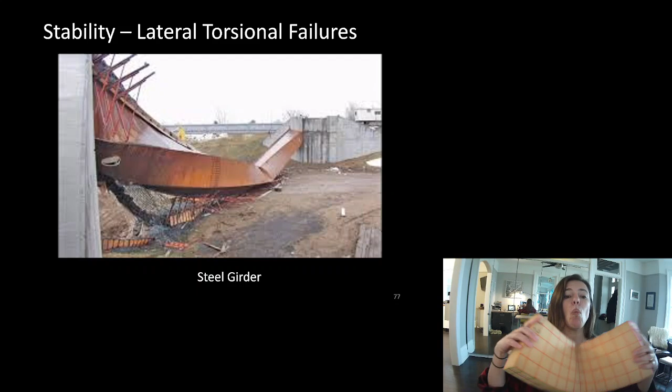All right, I said I didn't explain lateral torsional buckling. Our column buckles sideways under compression, and in our beams like this, remember the top chord is in compression and the bottom chord is in tension. Look what happens: the top that's in compression tries to buckle, but the bottom is in tension, so it doesn't care about buckling, it's going to do just great. Because only one side is buckling now, it tries to twist the beam, and that is why we call a buckling failure of the top chord a lateral torsional buckling failure. As it buckles sideways, it puts the weight off of the center of the beam and causes the whole beam to twist.

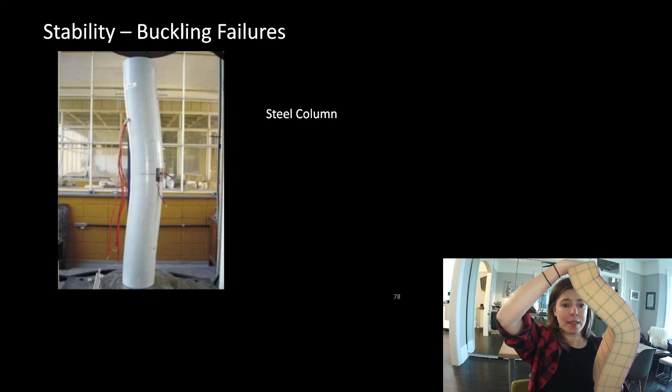All right, here's a buckling failure of a steel column, buckling sideways. Now this one happened to have a moment connection top and bottom, so it's still buckling, but it's a slightly different look to it.

I'm going to come back to this one in just a second. Oh no, it's way further down.

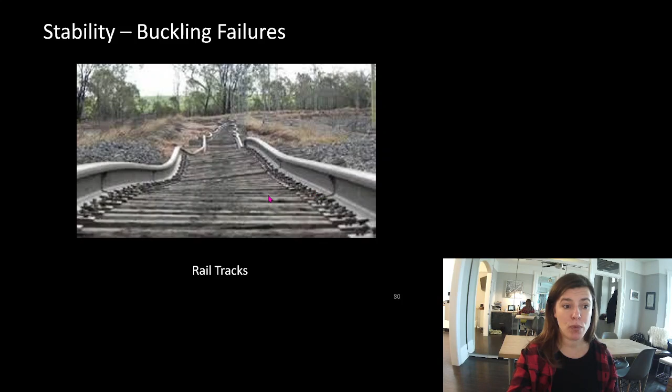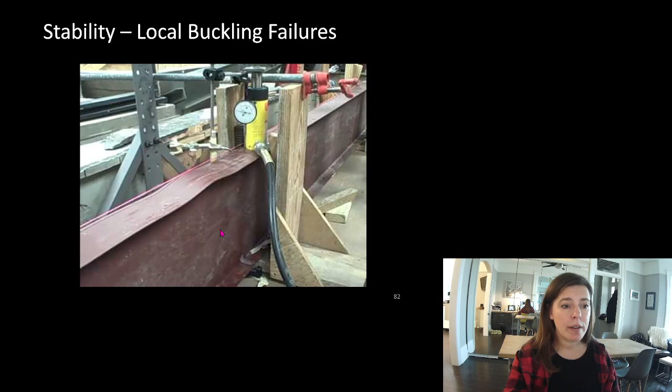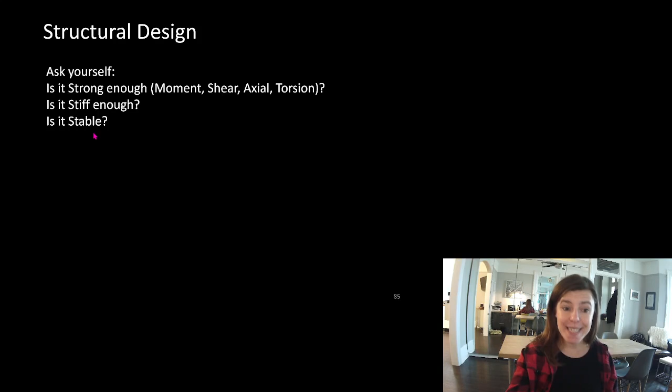Here is what you need to do all the time: Is it strong enough? By strong enough, I mean is it strong enough to resist? Is the reduced capacity greater than the factored load for moment, shear, axial, and torsion? Axial can be compression or tension. Is it stiff enough? And is it stable? You have to ask yourself that for the entire building and every system in the building, every element, and every connection. So is it strong enough, stiff enough, and stable? We're doing that for every system, every element, and every connection in our building.

You can imagine we go through this check again and again and again. We get pretty good at knowing the stable version, and then I'm going to teach you the calculations for stiff enough and strong enough. Last term we figured out how to calculate the factored loads, so now we just need to figure out the reduced capacities and make sure the reduced capacity is greater than the factored load. Last term we looked at the allowable deflection, so we know how much we'll allow it to deform. Now we need to figure out how much it actually deforms and make sure that actual deflection is less than the allowable deflection. If we can do all of those things, we will know we have an element that works.

So what are your takeaway tips? I usually like to break the takeaway tips into two components: forever tips that outlast my class, and things that aren't always the most important thing. You're about to go out into the world and be a practicing architect, possibly, and the things you need to know to pass my course might not be the same thing. Maybe it's something I can't test you on, or maybe it's just helpful to understand and know. Sometimes they are the same thing, sometimes they're not.

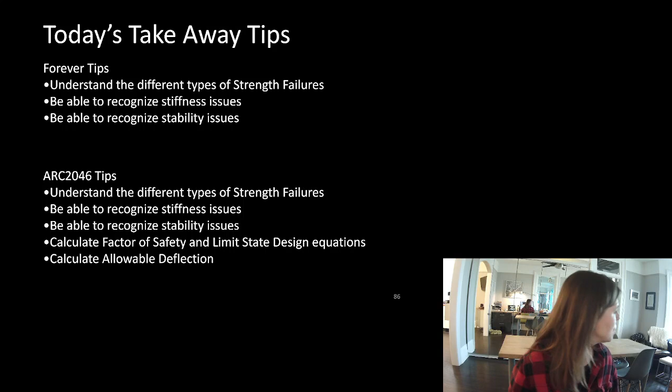Huh. Sorry, there was just someone in our driveway and I was checking to see what was happening. I'm assuming it's a mail delivery, but it's not an Amazon truck, it's not Purolator or anything like that. So I was just confused about what was happening.

So there are forever tips and things to pass the course. A lot of times they'll be the same thing, but not always. For both, you should understand the different types of strength failures, recognize a stiffness issue, and recognize a stability issue. Within my course, you should also be able to calculate... I know what it is, I'm doing a Scotch.

Sorry about that, I was about two sentences away from done, and that wasn't a mail delivery. We're doing a virtual Scotch tasting on Friday night, so they were just dropping the Scotch off for us. I certainly didn't want to miss that delivery.

So you need to be able to recognize stiffness issues, stability issues, calculate factor of safety and limit state design equations, and calculate allowable deflections. They're pretty simple equations. Remember, factor of safety: you multiply the sum of all the forces by some factor of safety, and it has to be less than the capacity. We don't like that way, we don't do it anymore. Now we make sure the reduced capacity is greater than the factored load. For allowable deflections, we did an example, so you can look it up on the chart and see what you need to do there.